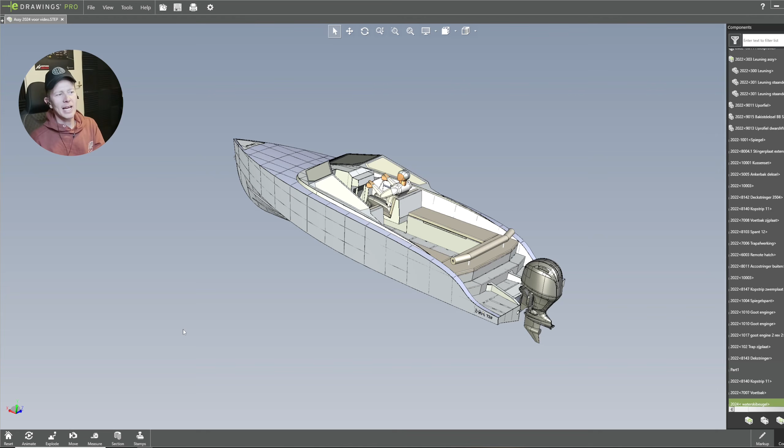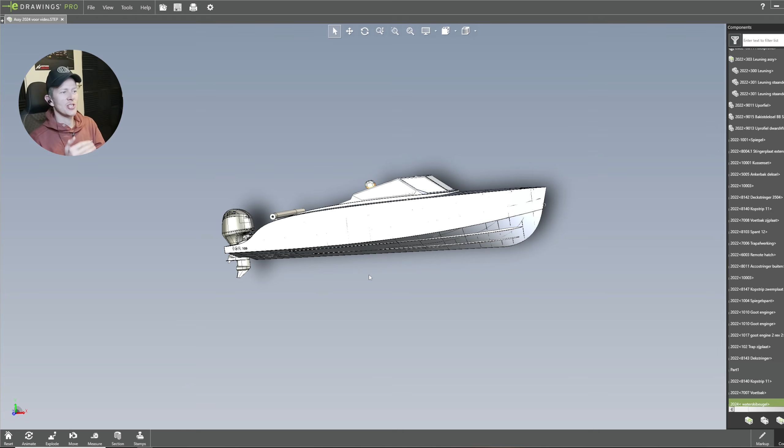If you want to know how to create your own speedboat in SolidWorks or other drawing software, then you're at the right place. In this video, I'm going to show you how I created this boat model that I'm actually going to build, and all the engineering decisions I made, a bit of the surface, why I came up with these shapes, and why I think this is absolutely beautiful. You're just gonna see the design ideas that I had.

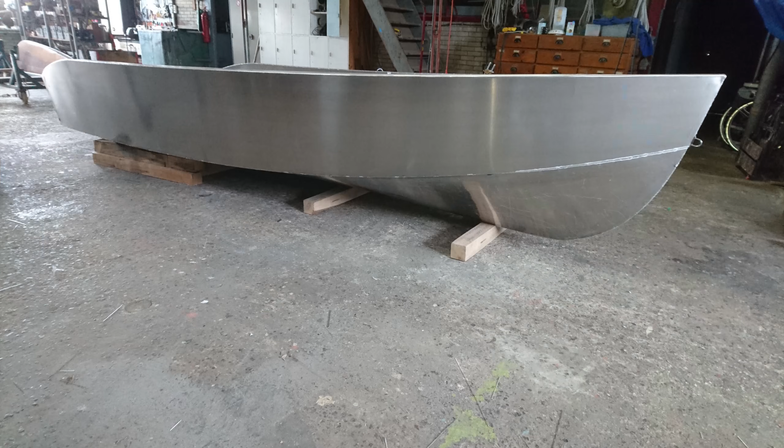I'm a craftsman for already 15 years, and I also have a deep passion for engineering software, but also I am crazy about boating and everything that has to do with water. Because of where I live, in the area where I live, we have a lot of lakes and water and all that stuff.

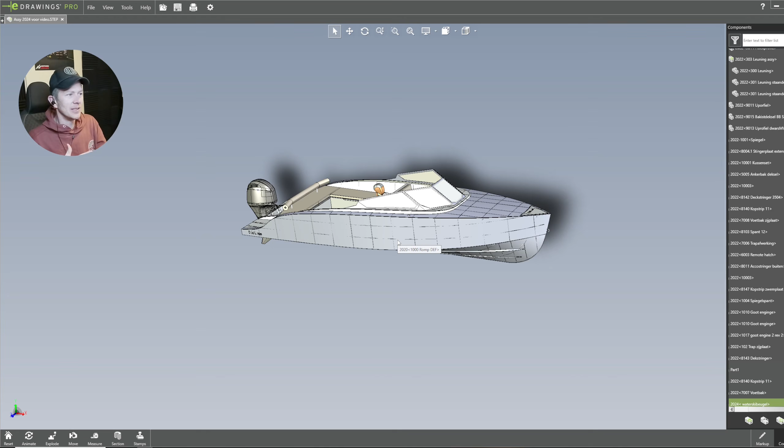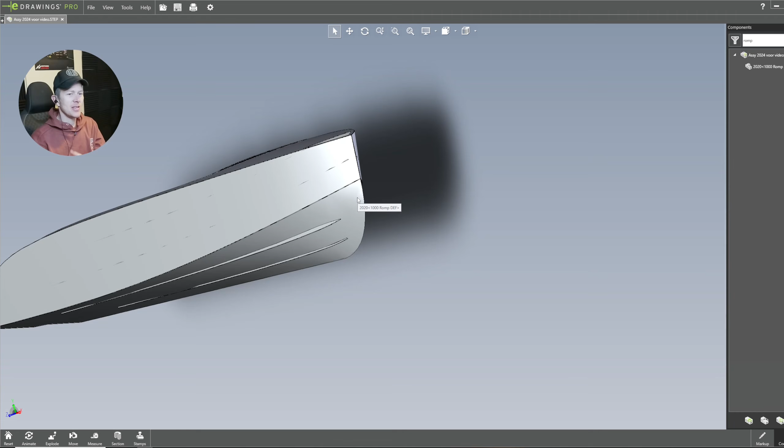Let's go, enjoy. Now, the biggest question about this design is, how do you come up with these shapes? Where does it start? What is the origin of it? To be fair, I just stole this from sailboats from my local area. They have this special sharp nose, as you can see here. And the sharpness of this nose is just having the least amount of resistance whenever your hull touches the point of the water.

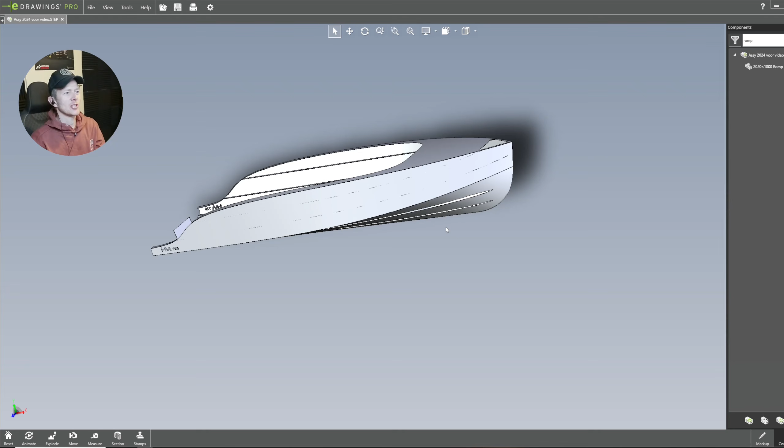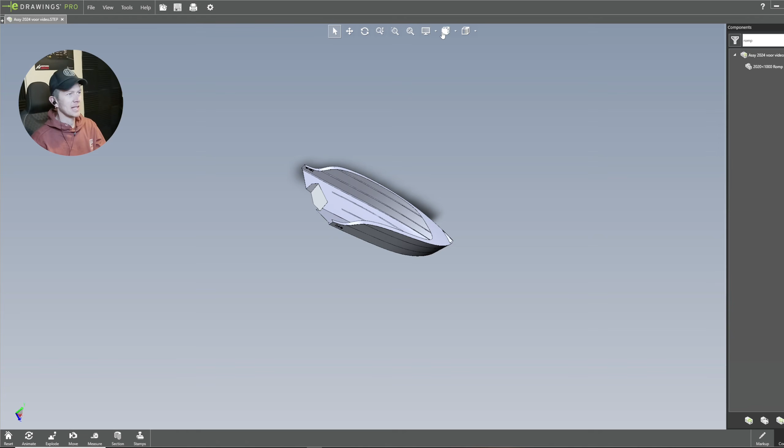If you look at aluminium speedboat design, they almost never have this design. There might be ones who have this design, but they're shaped differently, and that is just something I really didn't like. So I really like this shape, and the way I came up with it was basically drawing it out in 2D from the front, from the top, and obviously the other areas like the back and the front end.

I didn't make any calculations. This is just from the top of my head. I created this hull design, but it is actually from a smaller design that I already built, which was way smaller. I will show that right now.

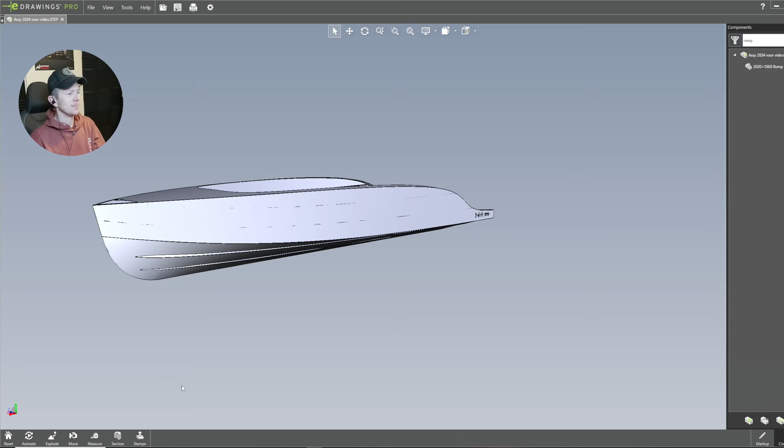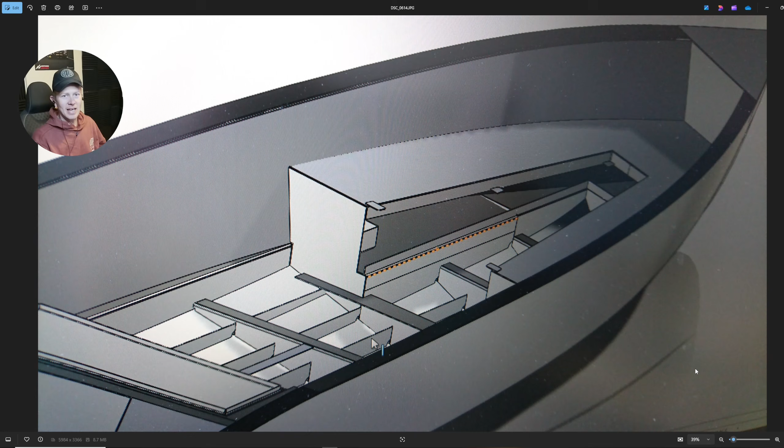Now, this is one of my first boats that I built, and obviously these were even older pictures from the SolidWorks drawing software I had at the time, but it's basically the same shape. Let's just move on to the slides quickly. This was a 5 meter design, and for a few grand I could get the sheet metal package, but I actually built this, and I know how the boat acts in a way.

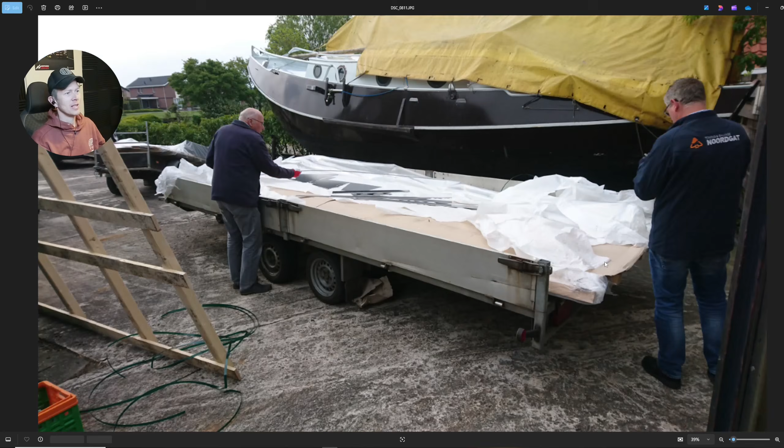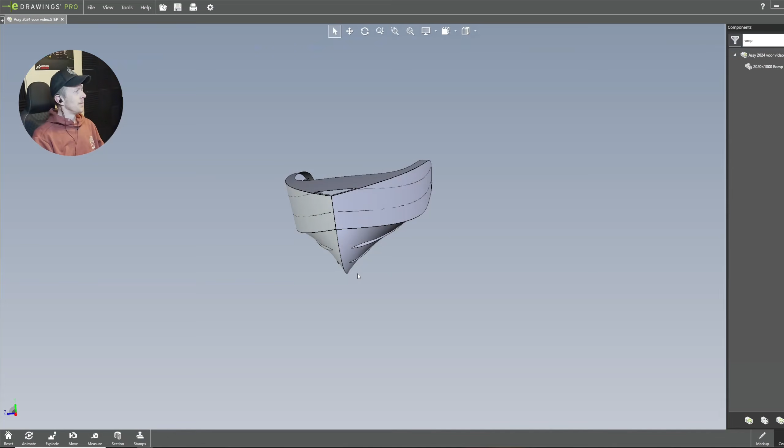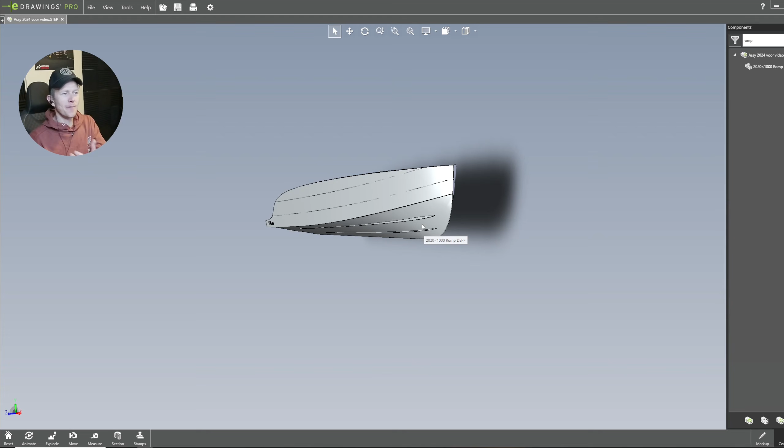Now this hull shape comes with a particular interesting challenge, because the bottom sheet over here is actually pretty hard to build. You need to have a forming template and different pressing machines to get that nose into the desired shape. This is also a very important reason why some boat manufacturers or people who want to build their own aluminium boat don't go for this shape, because it's pretty hard to twist it into these different angles.

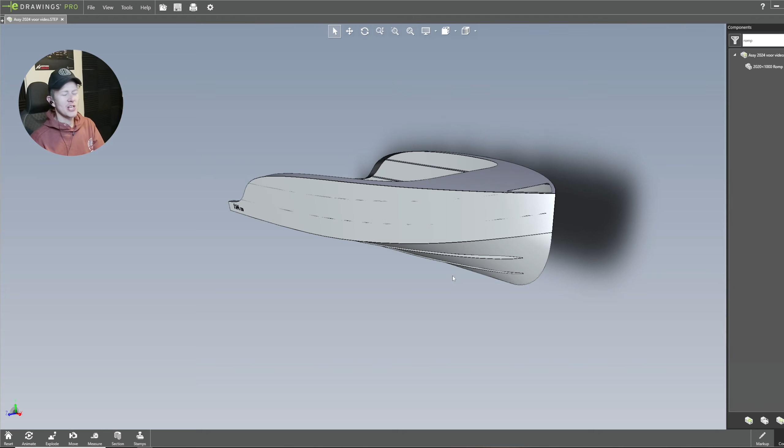But I just took the risk. I did this with the first one, the second one, and now for this design as well. Once you get it ready, you have this absolutely sweet hull shape that has really great sailing capabilities.

Now another thing with this design is that if you look at it from the back, it's actually really flat. This angle, the shape you see here, it's a pretty flat angle. So what does this do then? Well, you would say on rough terrain, when you're planing hard at high speed, you get a lot of discomfort from this.

And also that's sticking, you have more surface area connecting to the water, which gives you some resistance. But the absolute best part of this is it creates a very low planing speed. So at low power, I'm already planing really quickly and I get a massive amount of stability from it.

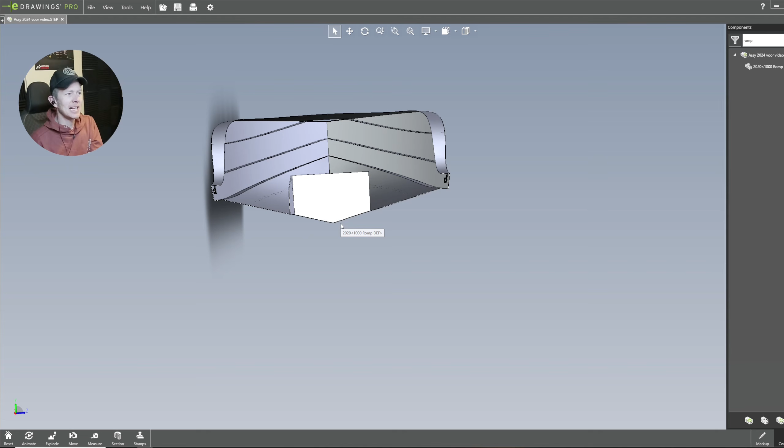So when I put a massive outboard on this boat, because we have the floating pressure from underneath, and a pretty flat shape on the back, I could put a massive amount of power on the back without the boat going backwards too much.

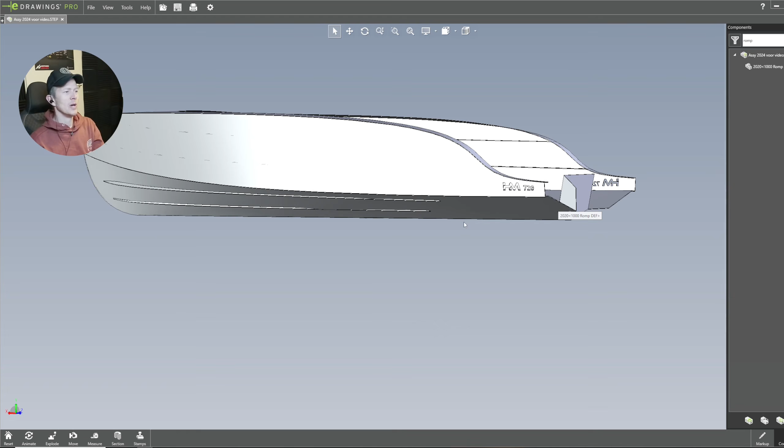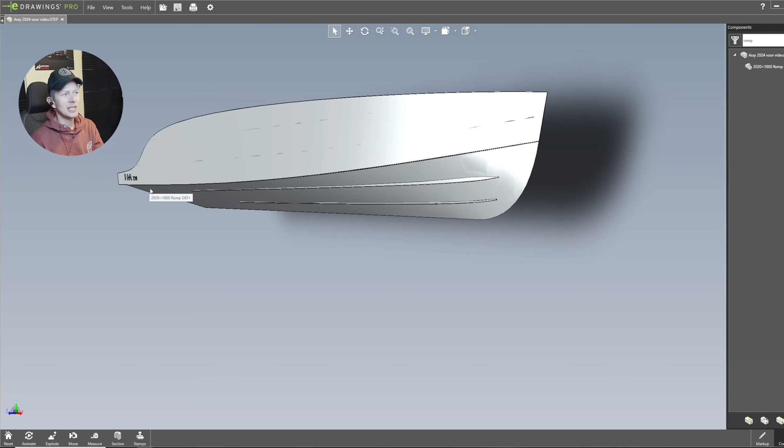But then again, it's not really uncomfortable when we are at high speeds in rough water terrain. We have the sharpness really breaking down the waves before we get to this flat spot. The little disadvantage is the absolute top speed might be a little lower, but then again, it's my design, so I get to decide, right?

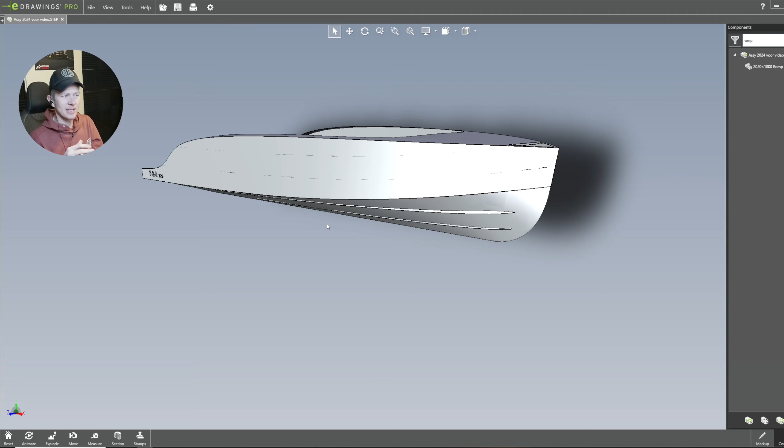Now, how did I create this, and how do I build further? How do you create the windows? How do you create everything? Actually, this whole design is pretty simple. It wasn't that hard to create, but the hardest part is where do you fit the chairs, how big the window is gonna be, and all that stuff.

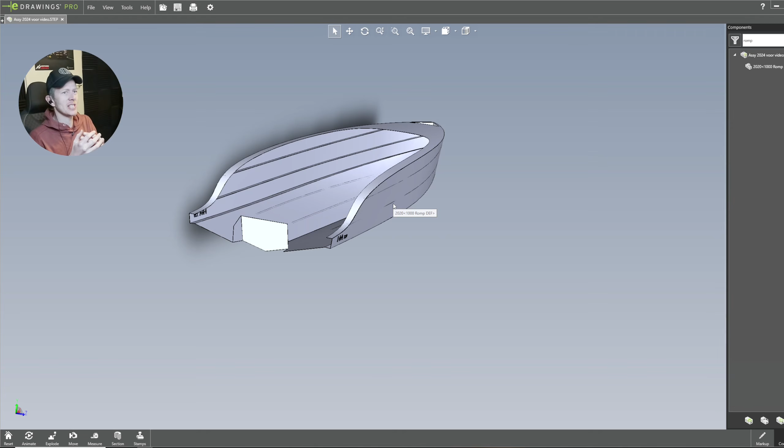In this next example, I will show you how I created this hull shape, and then after, I'm gonna tell how I created the overall design, and then we'll just move on from there.

The bottom plate, 5mm thick aluminium, I chopped. This is in SolidWorks. I don't have the license anymore, so I promise if I get 1,000 subscribers, I will get a new license for SolidWorks and make a full tutorial of this.

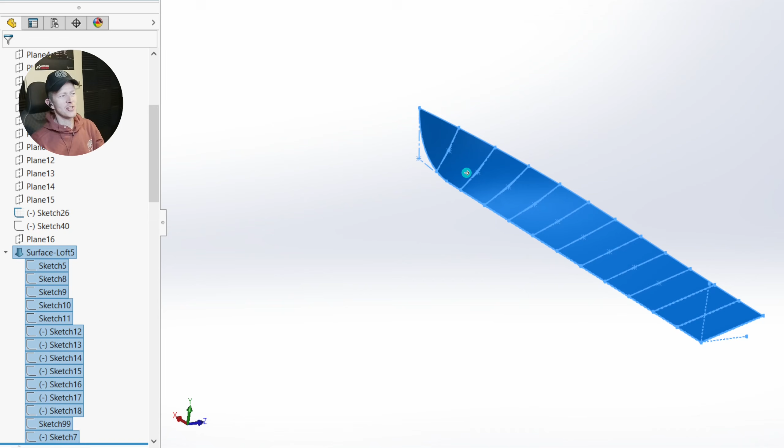I learned this from the other two models that I built. So basically every 500mm there is a shape. This is also going to be all the strengthening plates on all the way of the width will be there.

So absolutely, we put marks here as well to understand where we need to put these plates when we're welding everything, right? This is basically a loft function with guide curves and everything.

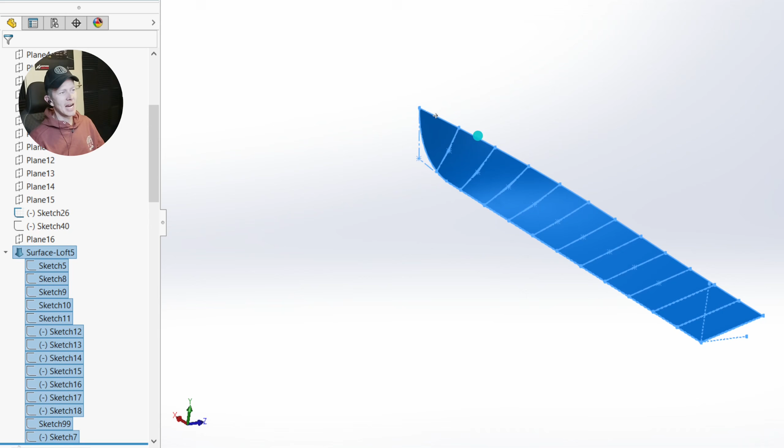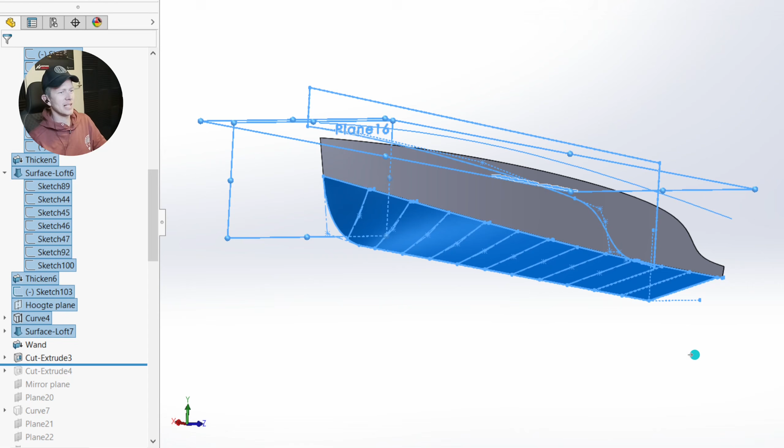Also, this is what I drew out from the side. If you look from the side, I'm drawing approximately this line. This is how I want that line to look. Here you have a little preview of all the different lines I created, and that brought me to this final shape.

Now in SolidWorks, I use the project curve function. With project curve, you make a 2D sketch and another 2D sketch, and then with project curve you can connect those two and it will follow a 3D geometry.

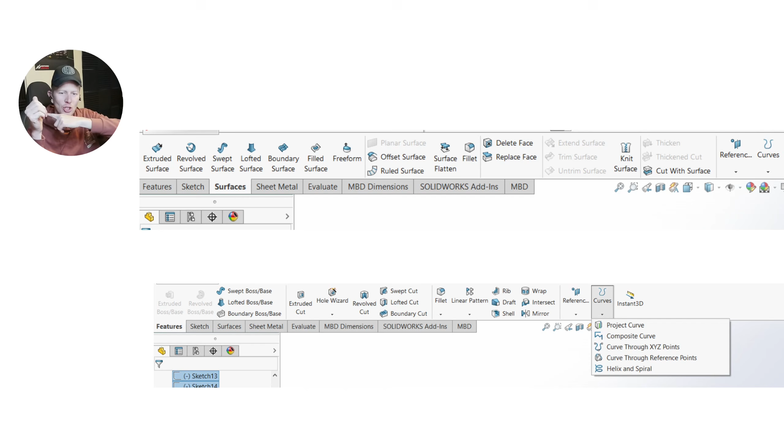And then all these lines I connected with relations, and then I created a loft, and the loft is actually creating that surface. That surface then you...

Thicken up. So you have here on SolidWorks the, where is it? Can't find it. Over here you could thicken, then you thicken up that loft, and then you can push it back with the flatten surface function, and then you put the flattened surface, and that is actually the file that the cutter needs to have to shape that out.

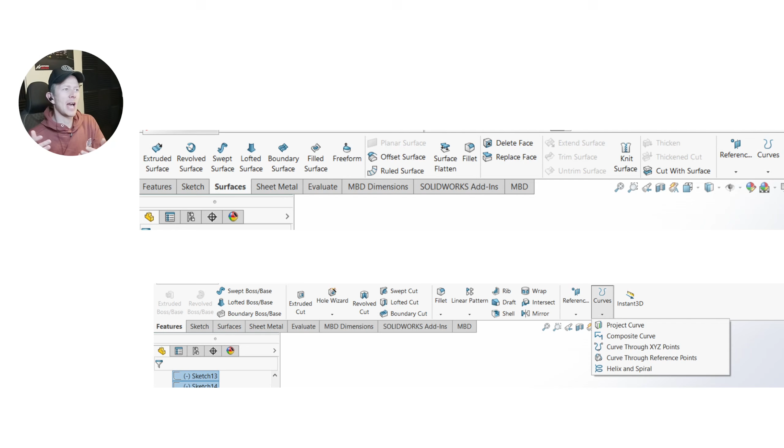So it doesn't really matter which software you use. I really like SolidWorks because I just understood it. A lot of people told me you couldn't do it in SolidWorks. I will prove in this video series that you can, and it's absolutely sweet.

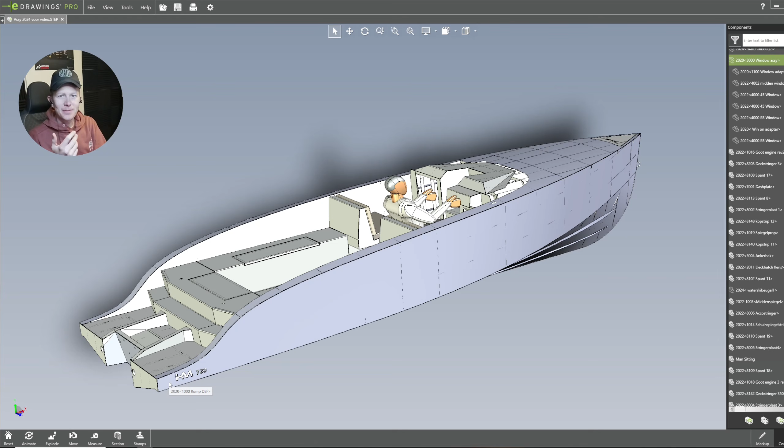So let's move on. When you create a hull, you want to find some sort of a person that has basically the same length and shapes as you, and you want to build that into your design. But that is actually pretty hard to do because in this design it's already here, but if there's nothing, it's really hard to figure out where you need to start.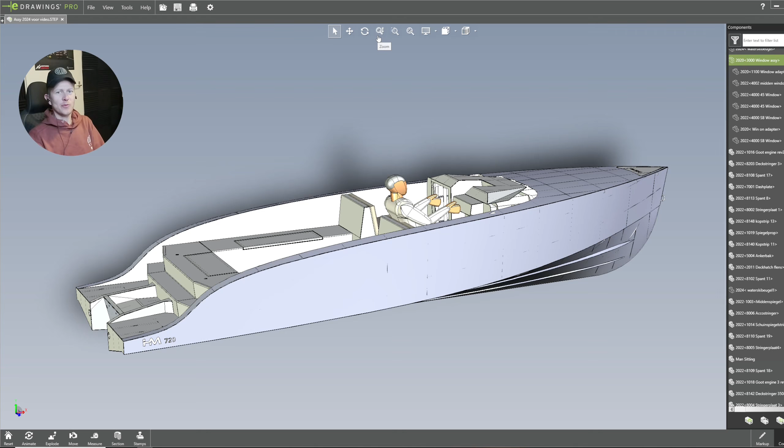So I knew from experience that the area I want to stand with my feet on, this you could consider the main deck, that's this area.

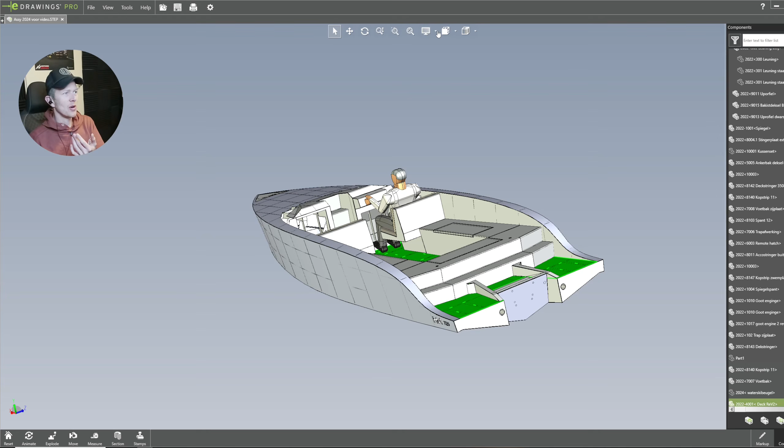I want to have this self-draining main deck, so it's above the water line. Every time water comes in, it will go out of these holes. So what I did, if you want to design your own, that plate fills out the hull completely. You design it so the hull is completely empty and you create a main deck on top.

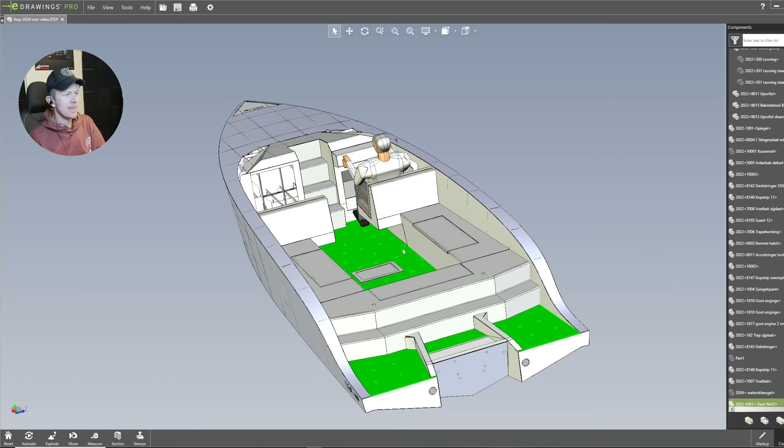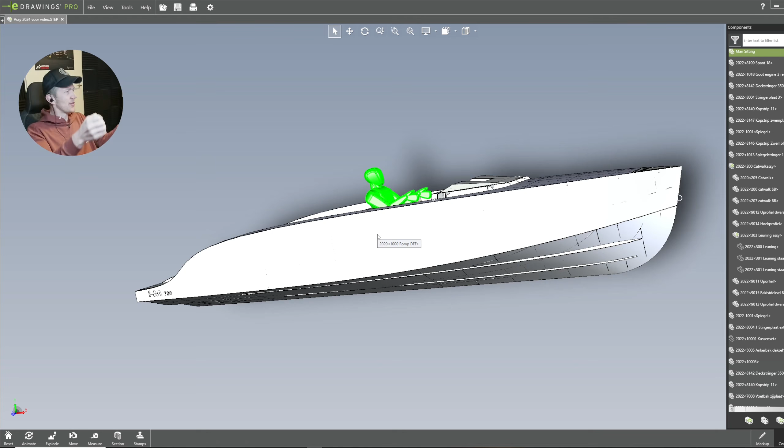Then you want to bring a person up on that floor and see how high you're actually going to sit, because I want to sit on my boat and look out the window and see where I'm going. It's pretty hard if you're looking up into the beam of the window, or you're too low or too high. You want the steering wheel at the proper position, and have space around your feet.

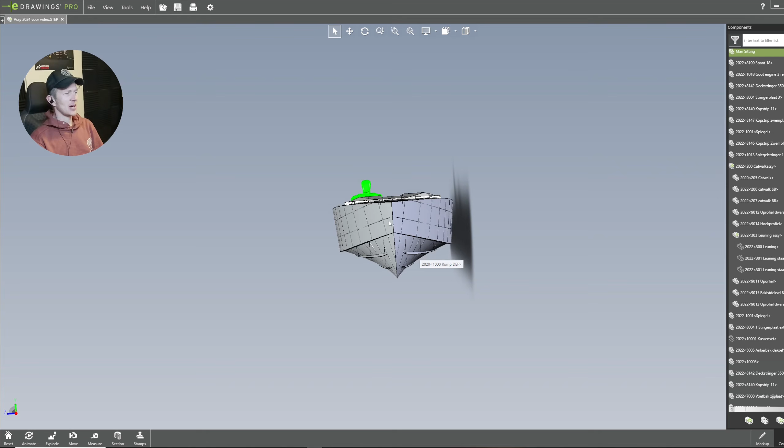So when I put this guy in here, his name is Knapinga. It's Dutch, a little joke, just a random guy. I want my face pointing like this, I want my head above the main deck and I actually want that to fit.

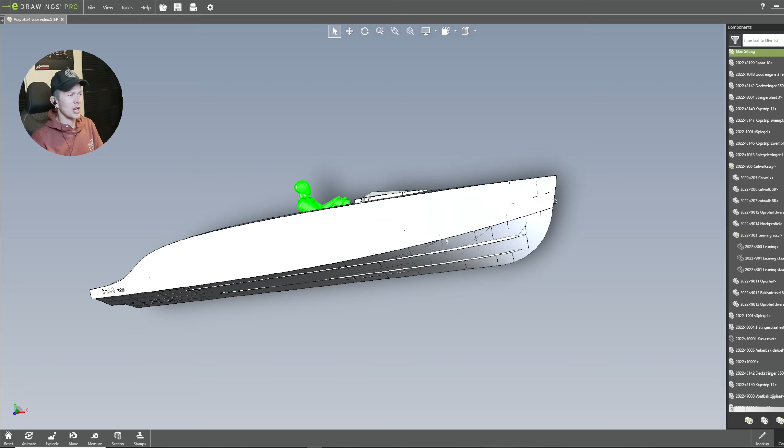Now the funny thing is, for this design it had to be 7.2 meters long, like 23 to 25 feet, because otherwise the boat would not look pretty. By the way, this design is a pretty boat that looks nice and has great sailing capabilities. I don't care about comfort, I don't care about a lot of room for toilets or anything. This is purely for a nice design and great sailing properties.

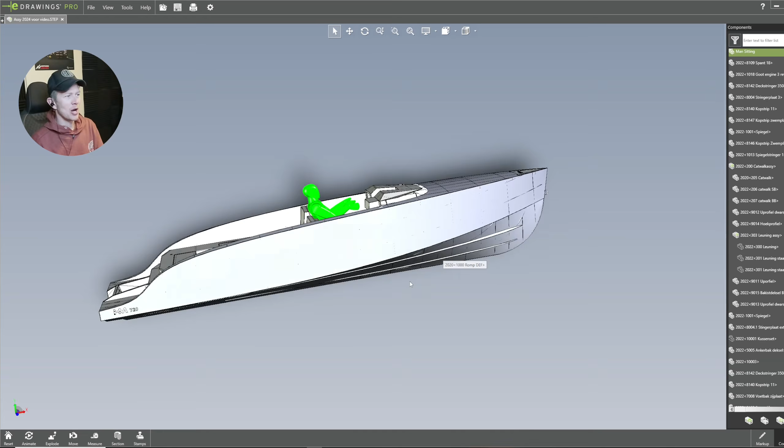I don't care about comfort. There's too much comfort in this world already. So that's how I came up with it.

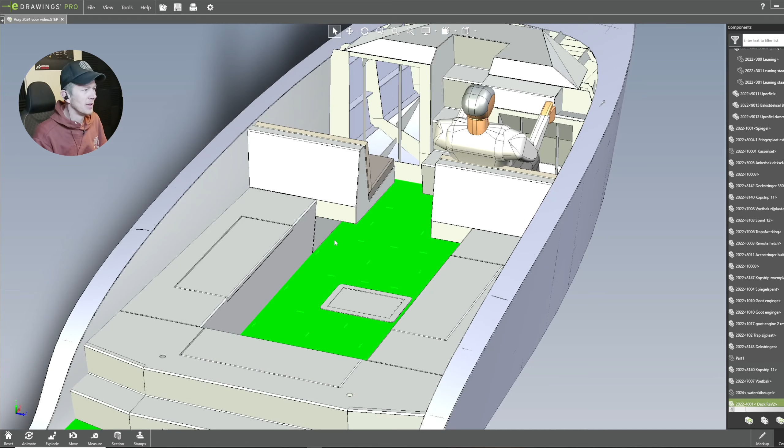Then I had to fill up this area, starting from the main deck. So I'm actually in my living room putting a measuring tape to figure out how high the seat needs to be compared to the floor, because I don't want to sit with my knees up. I also had to consider a pillow to sit on, and this all needs to be welded and connected together.

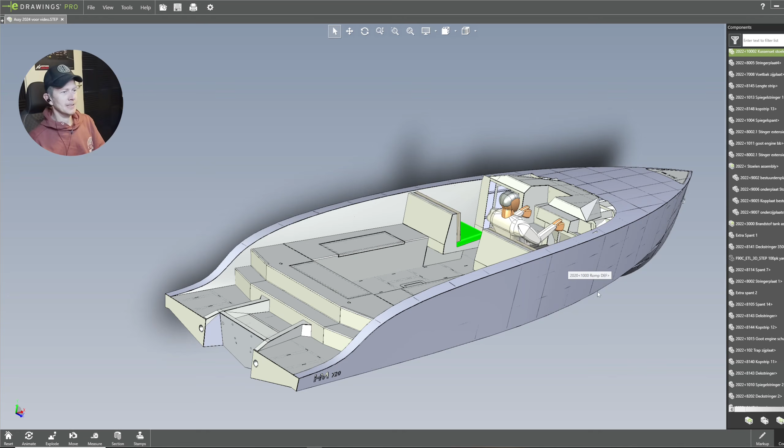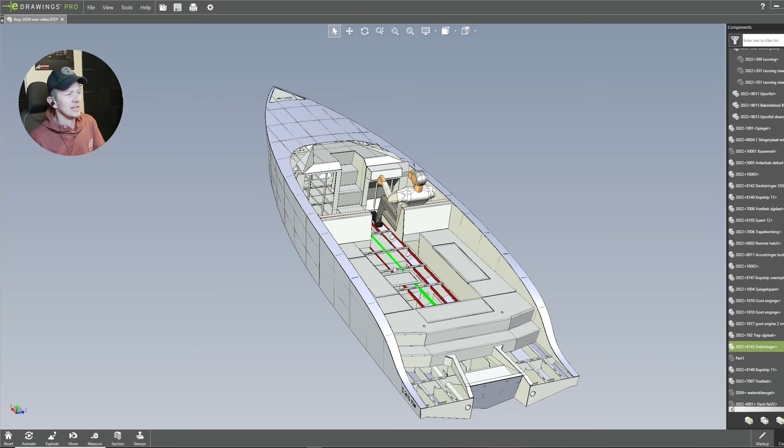That's just how I came up with this design. Later on you figure out all the stuff, like the seats, where the staircase is going to be on the front so we can go onto the front deck to put ropes to shore, whatever. Once everything is complete, you can start building the beams, the strength and the construction, because you know where it needs to end and land.

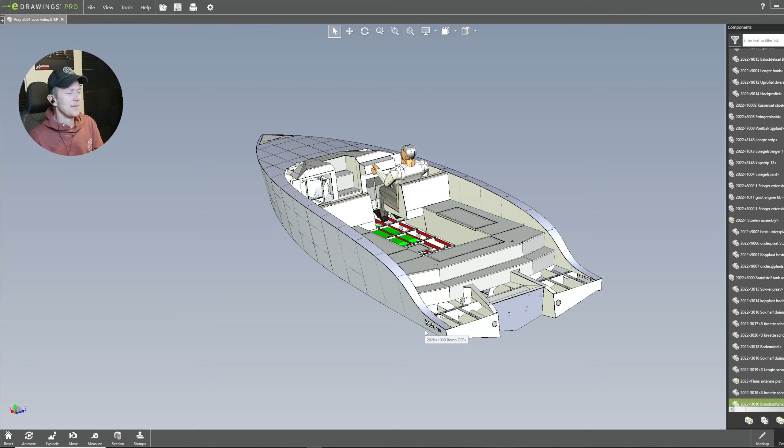A little detail here for the fuel tank, which is actually in the middle. I gave someone the hull design and they told me what the pressure point was — that's the only calculation I actually did. Meaning, if I put pressure on this hull when it's in the water, it needs to level down at the same spot, and it's somewhere around this guy right here. That's also the positioning of the fuel tank.

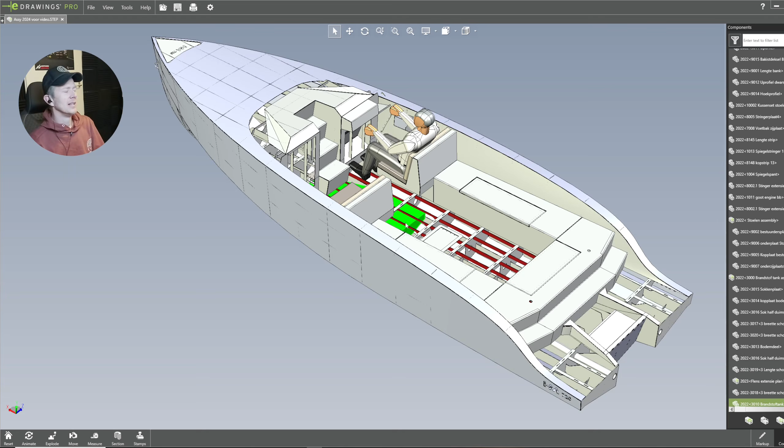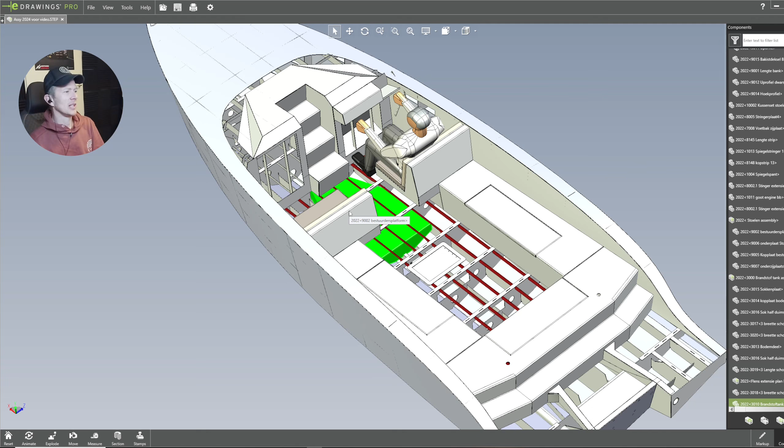It's only 120 liters, but I could make this twice as long, or even maybe three times the length, so we could make it maybe 500 liters at max capacity. But then you also need to carry all that fuel with you, and with only 175 or 200 horsepower behind this boat at this design, I think that's more than enough. I always said like 120 liters of petrol — that's enough for me to fuel up my boat when I go out.

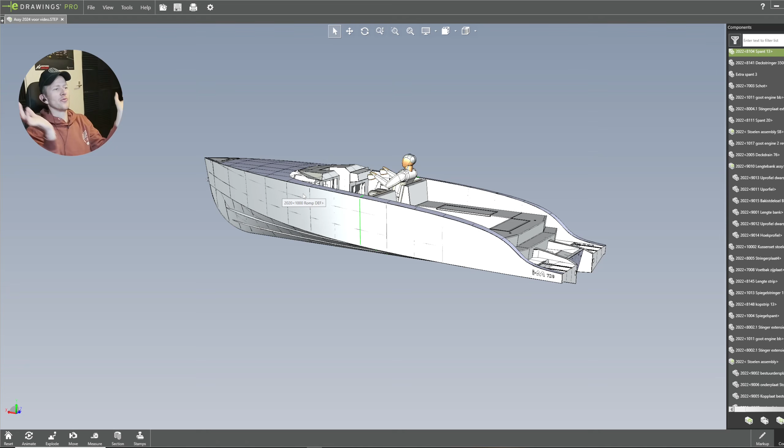So then I just created all these shapes between it. I actually cut the model in half and started drawing out all the geometry where all these plates are, and you get all these round shaped plates. I'll show you that right now, how that approximately looks.

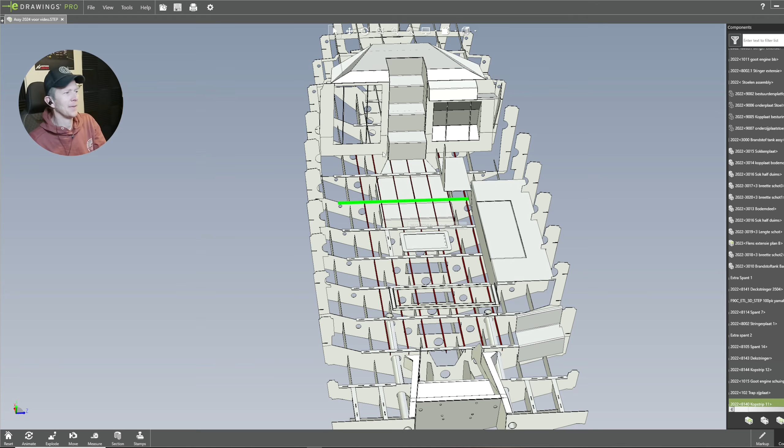Here you can see the plates — this is basically the outer shape and the inner shape connected. On top of this plate we have the main deck. But we can only figure that out once we've completely designed the seatings, the hull and everything, and then we just need to create the inner construction to make it all fit. So that's what we did, and here you can see the construction.

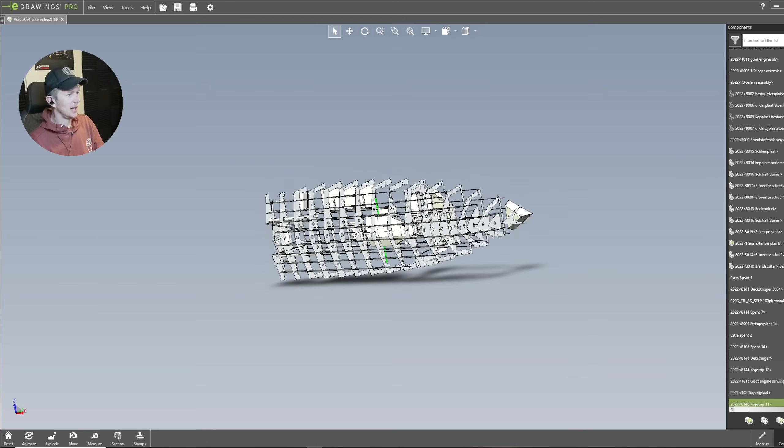Now if you look at this and you don't really know, you might think, man, what an absolutely insane construction. And it is, and it's a lot of welding. But when I take out my kids, my family, and I'm attacking the big waves, I want that strong design.

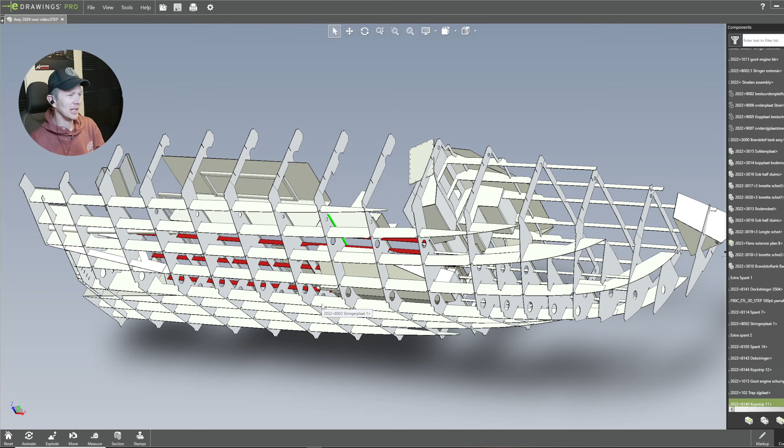Trust me, this looks like a lot, but in aluminium, this is one of the lightest speedboats you will find on the Frisian lakes where I live. And with 175 horsepower, I'm actually a lot quicker than other boats, and also massively more lean on fuel usage, because of the hull design.

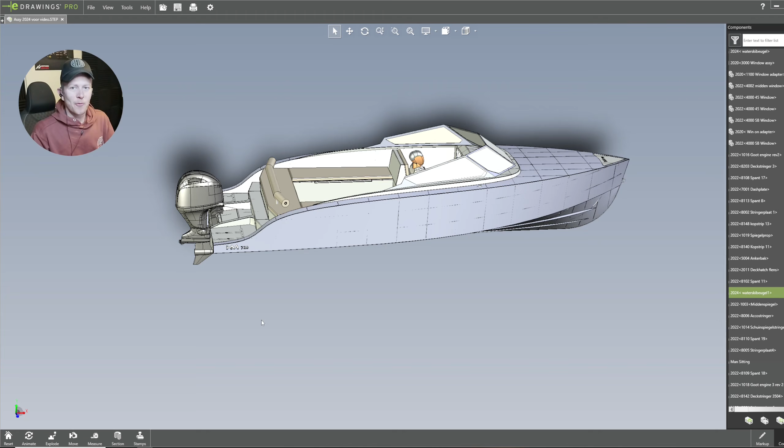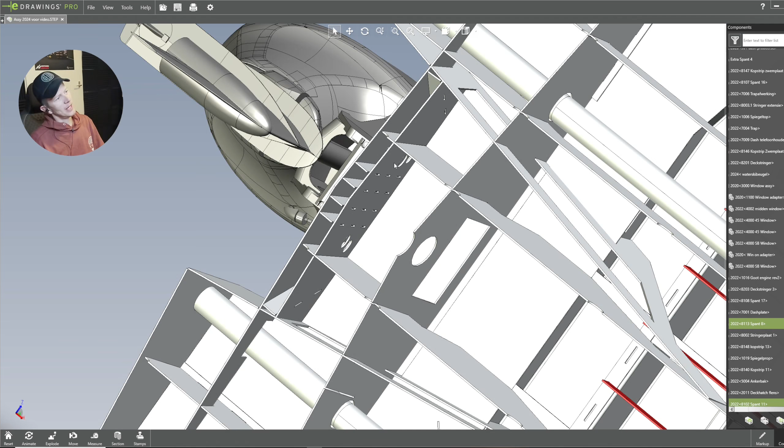Okay, let's move on. Now at the end, when I start drawing everything out, let's talk about the outboard. So you got these measurements for outboards, and the back plate over here. I will show now with this construction that we have a lot of additional strengthening and metal to connect the bolts of the engine. So there's a lot of construction here to make sure I just don't want to lose my outboard, so it's really strong.

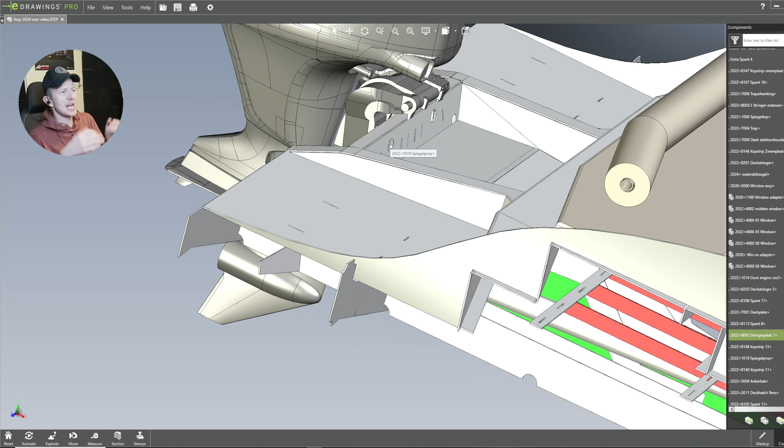Again, I didn't really make any calculations for it, but I knew from the other boat projects that the guys that put the engine on the back, the service they provide, I asked them, hey man, do you think my back end of the boat is strong enough for big outboards? And they said, we never ever seen such a strong back end of a speedboat before. So that really gave me some confidence that we can carry that design over to this boat as well.

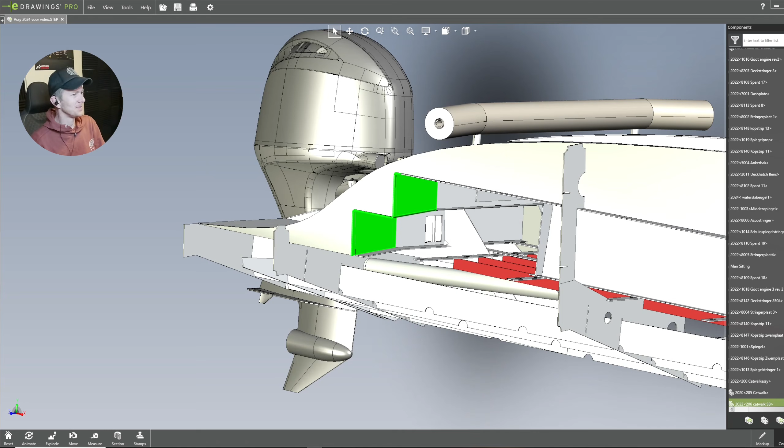Now here you can see all this sheet metal working. This is actually what you see when you don't have the hull on the outside. Here you can see the fuel tank. The position of the fuel tank is actually really great because it's on the lower end. It's good for stability, and it doesn't take up space anywhere.

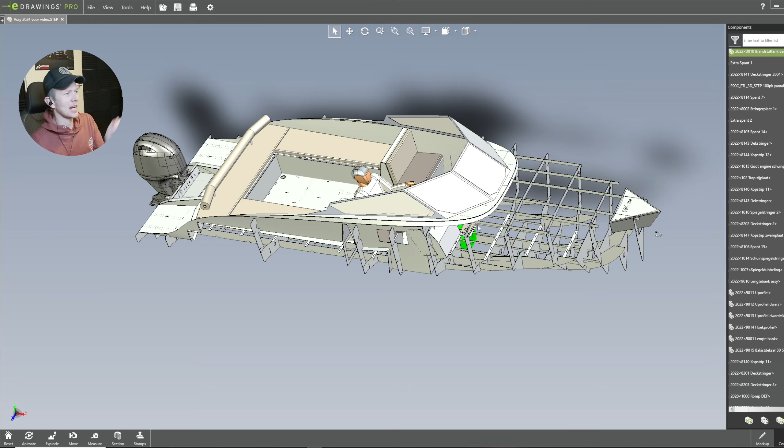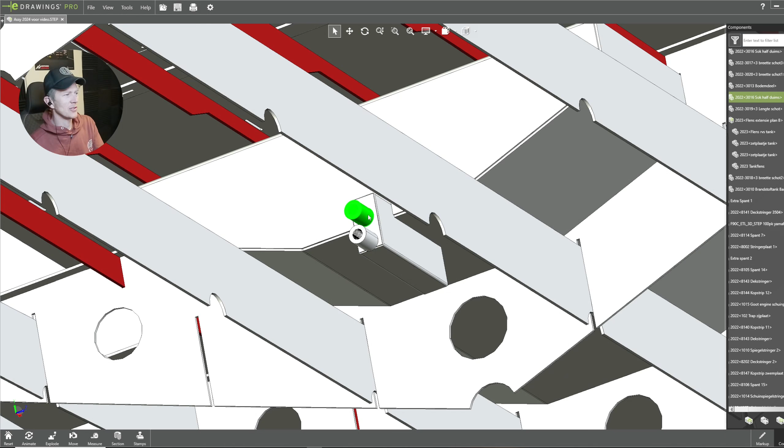Here on the front, we have the level meter and the hose and the filling. And here on the back, on the bottom, this will be a drainage if you carry any water, or the absolute garbage in the fuel will be on the lower side of this beam, and on the top this will be our main suction for the fuel.

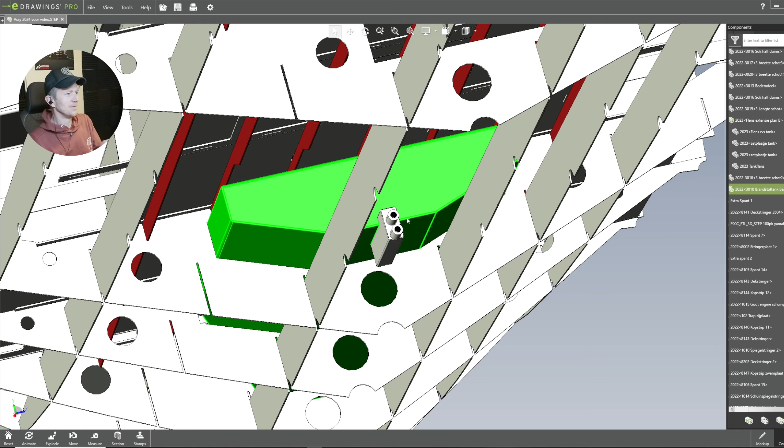And this is actually, because the tank is pretty flat, we have a little bit of an issue where the petrol is going sideways and the engine might miss, or the hose might miss a supply of fuel to the hose. Now, because it's a little bit lower, we can actually always get fuel supply to the engine.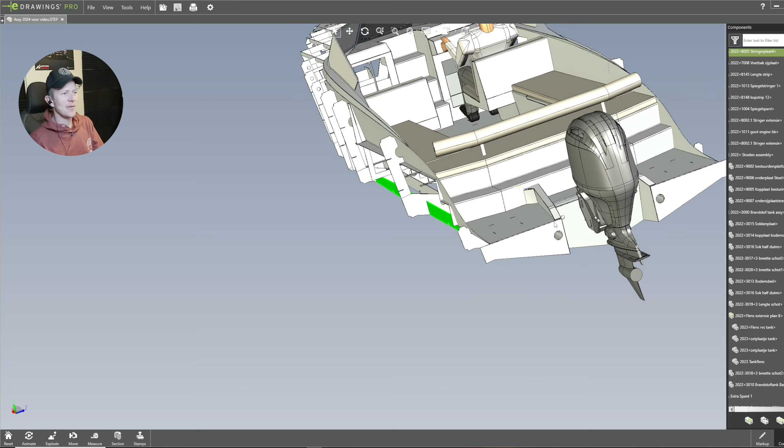So yeah, obviously it's full of these holes. These holes make sure that if there ever was water in the boat, it will always find the bottom place in the boat. So every time you have a water leakage or there's some water going in your hull, it's always finding the bottom point right here. And here we connect a small bilge pump where we can get rid of all the water.

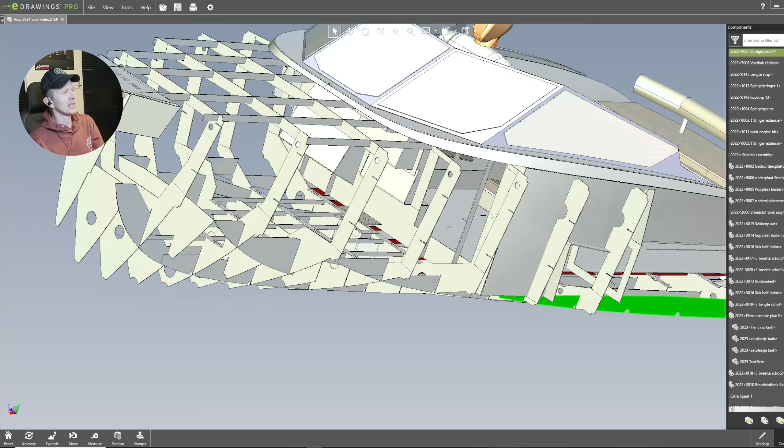Now on the front inside, this is pretty much enough space for two persons who could be intimate, or forced to be intimate, to sleep. So I always say to people, is it made for sleeping and weekends? Not really, it's really a day boat. But if you're getting completely shit-faced at the bar and you're there with the boat, you have the option to crawl inside of the nose and sleep it over before you go onto the water again. That's basically a little bit of the idea.

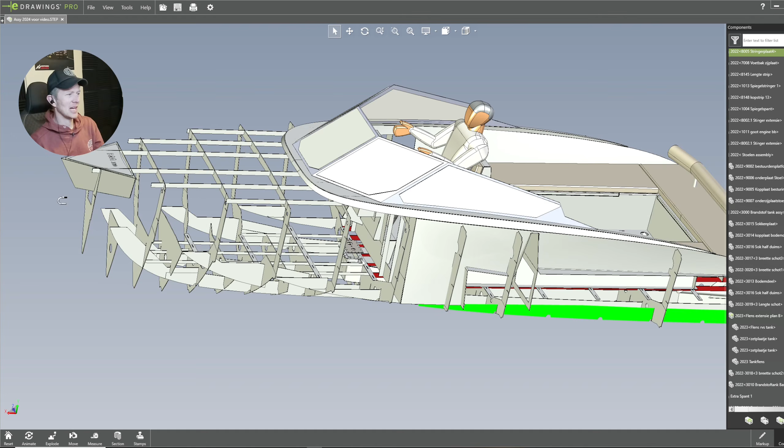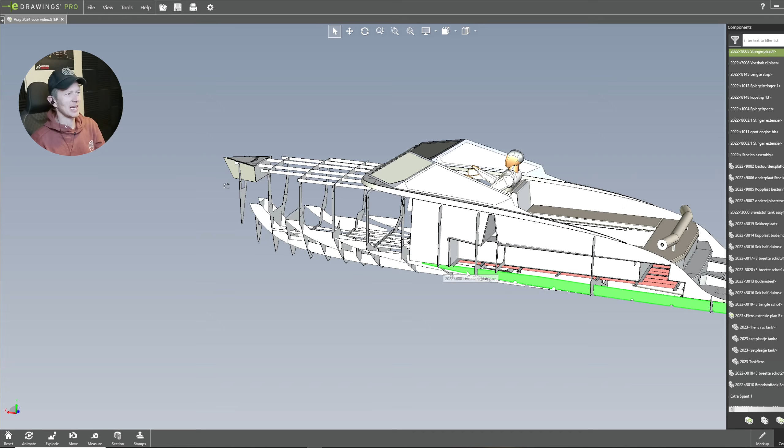And that's great for storage, but it's absolutely a very small area. Here on the front, you cannot really sit here or do anything, you can just lie down here and that's all. So also people have said to me, yeah, if you really want to make business out of it, there needs to be a toilet. Well, you can get a bucket, right? If you're that desperate, you can get a bucket and do your thing, nobody cares.

Maximum 200 horsepower. The bottom hull plates are 5 millimeters and the rest of it is 4 millimeters.